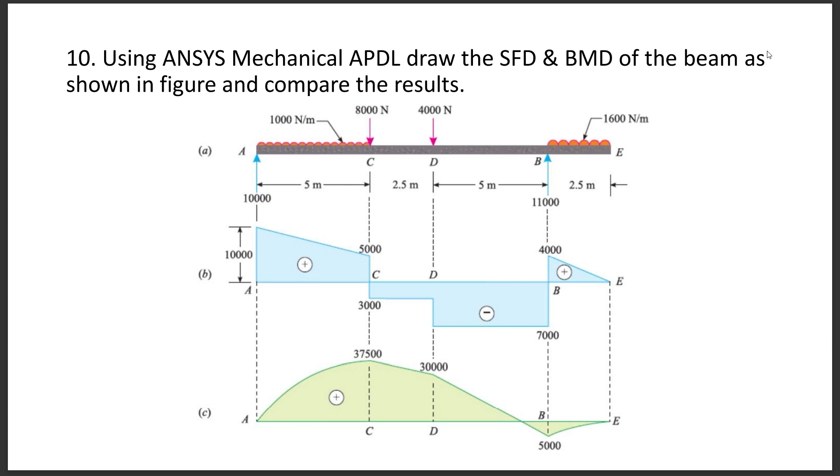We need to analyze this one using ANSYS Mechanical APDL and then we have to compare these results with the question paper itself, because in the question paper itself we are having the results that we compare with the results obtained from ANSYS Mechanical APDL, right? So without wasting time, let us start our analysis using ANSYS Mechanical APDL.

First of all, we need to create a directory and in that directory we need to save everything. Next to that, we need to change the title. That can be done from File, Change Title, and we are keeping the name as FEA10. To see the title we can click on Plot, Replot, so it is visible at the lower left corner. Now we need to define what type of analysis it is and it will come from Preferences. So preferences is structural analysis.

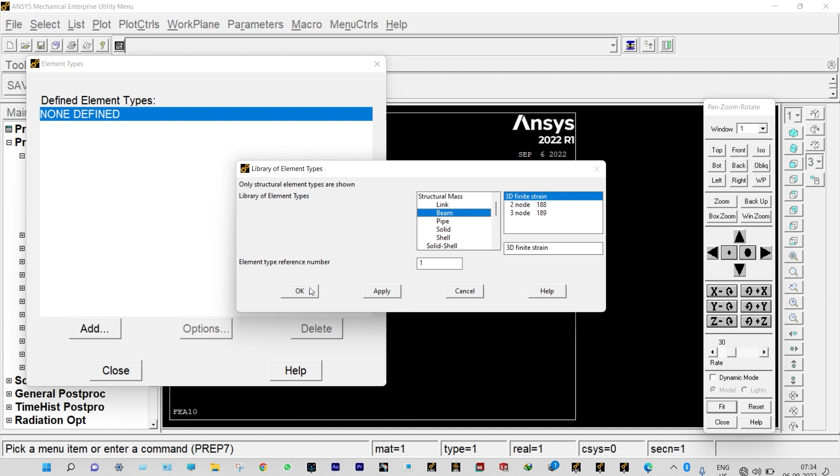Now we need to define elemental properties. It will come from Preprocessor. Element Type, Add/Edit/Delete. So we need to add it. We're considering BEAM 3D 2-node 188 and element type reference number is 1. And from options, you can select element behavior as cubic form. Okay, done. Let us close it.

Now we need to provide material properties. So Material Models, Structural, Linear, Elastic, Isotropic, and we know that it is having modulus of elasticity of 2 into 10 to the 11 Newton per meter square and Poisson's ratio is 0.3. So modulus of elasticity is 2e11 and Poisson's ratio 0.3.

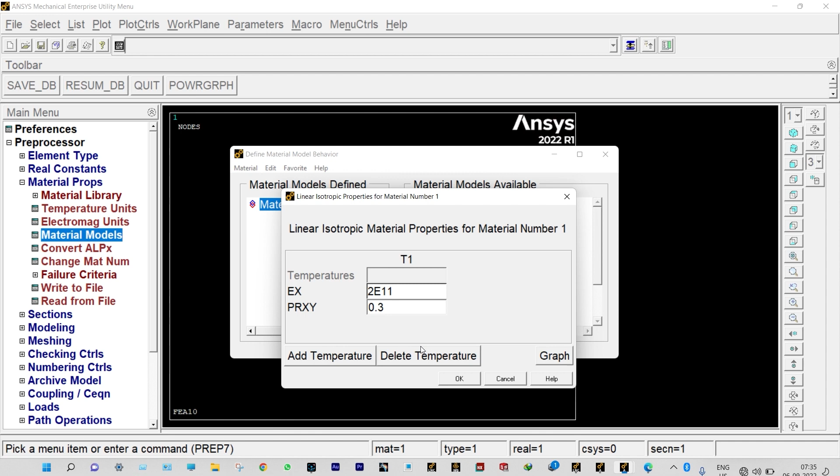Okay, done. Now we need to provide sections and it is having a square cross section of breadth equal to 0.01 meter and height also equal to 0.01 meter, right? So breadth equal to 0.01 meter and height also 0.01 meter. Okay, done. Now we need to start modeling.

Create key points in active coordinate system. We know that total span of the beam is 15 meter and first key point will be created at origin. So apply. Second key point will be at a distance of 5 meter from origin. So 5 along X. Apply. Third one will be at a distance of 7.5 meter from origin. Apply. Fourth one will be at a distance of 12.5 meter from origin. Apply. Fifth one will be at a distance of 15 meter from origin.

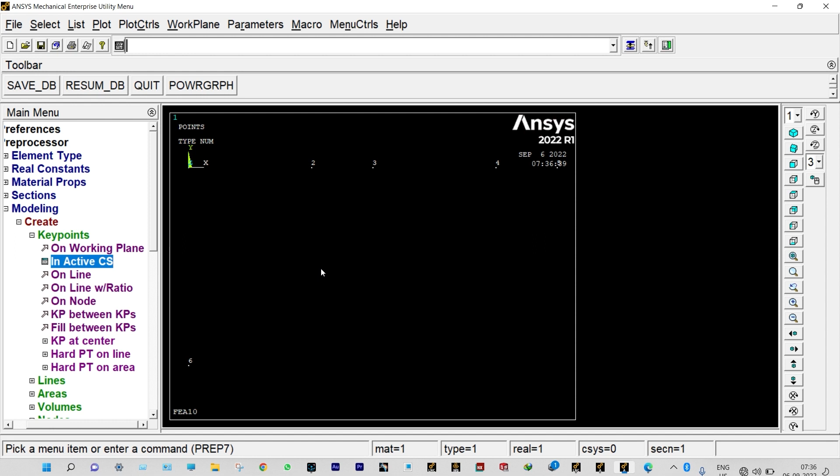Apply. Now one extra key point should be provided for the orientation of the beam, and let us provide that one at x equal to 0 and y equal to -8. Okay, we created all the necessary key points. Now we need to join all these key points in the form of lines. So Create Lines, Straight Lines, and let us join key point number 1 and 2. Done. Now 2 and 3. Done. 3 and 4, and finally 4 and 5.

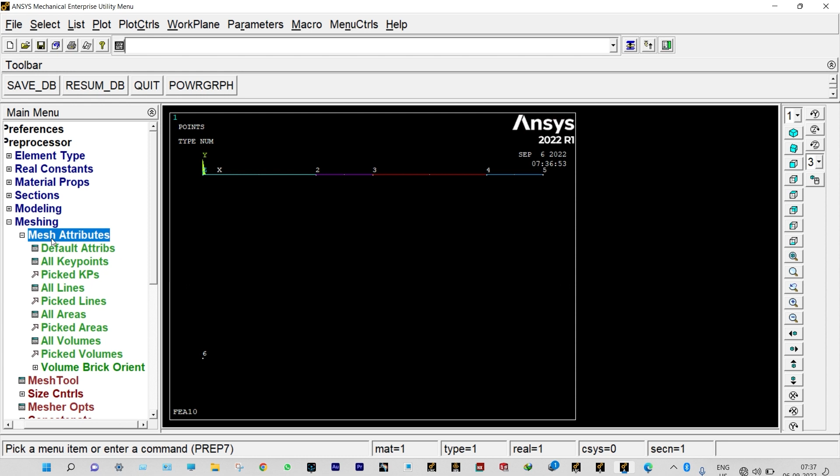Okay, we joined all the lines excluding that extra key point 6 which is required for orientation of the beam, right? Now we need to mesh it. Meshing, and first of all we need to select mesh attributes. We need to consider that orientation key point also, so we are selecting all the lines, and we are selecting orientation key point 6. Okay, done. Now we can mesh it.

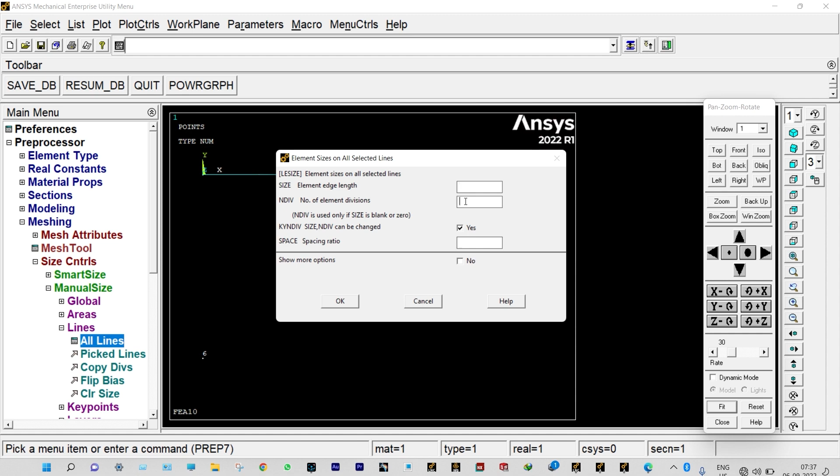So Size Controls, Manual Size, Lines, All Lines, and we are considering number of elemental divisions for each line equal to 10. Okay, done. Now finally we can mesh it. So Mesh Lines, Pick All, meshing is complete. Now we can apply our boundary conditions and that will come from Loads. Loads, Analysis Type, it is a new analysis and it is static structural analysis. Okay, done. Now we need to define loads. Apply structural displacement on key points.

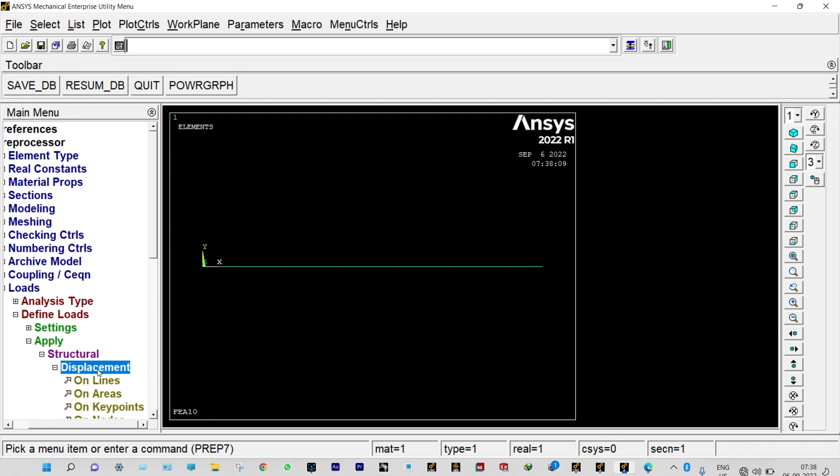It is an overhanging beam and it will be having support at two different locations. Let us see the lines. So plot lines. We need to provide a support at this location and also at this location, right? So select key point number 1, apply. Let us select UX, UY and UZ, and also rotation X and also rotation Y. So the key point is restricted to move along all these points.

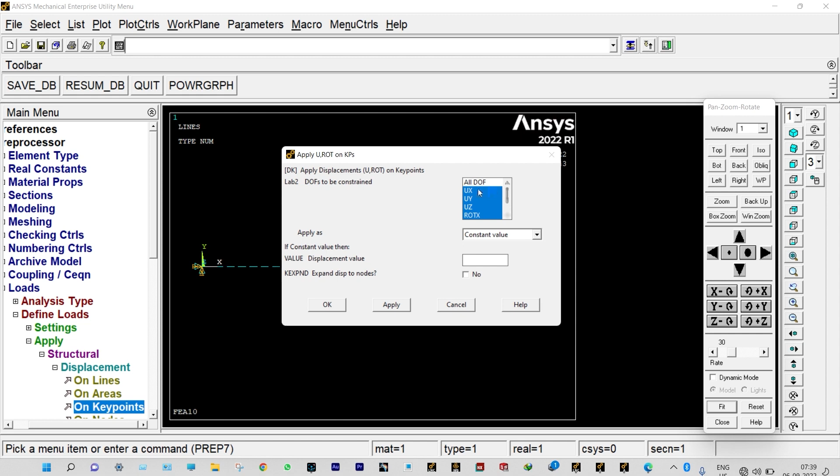Apply. Let us select the next required key point at this location. Okay, here in this case it will be restricted to move along UY, UZ and rotation X and rotation Y. Okay, done. Now we need to apply 2 point loads at this location and this location, right? Let us see the question paper itself. We need to apply point load of 8000 Newton at location C and 4000 Newton at D, right?

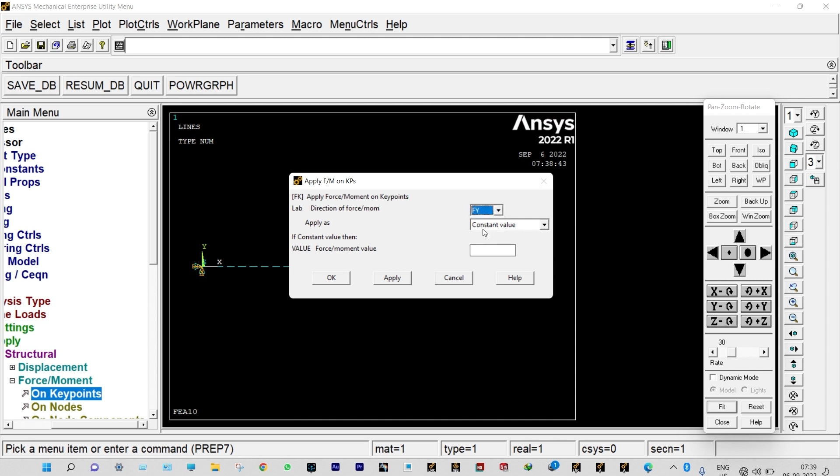So structural force moment on key points. Let us select this key point, apply. It will be in the y direction, FY, and it will be in the negative, so it will be minus 8000 Newton. Apply, and second one it will be minus 4000 Newton again. Okay, we have applied our concentrated load.

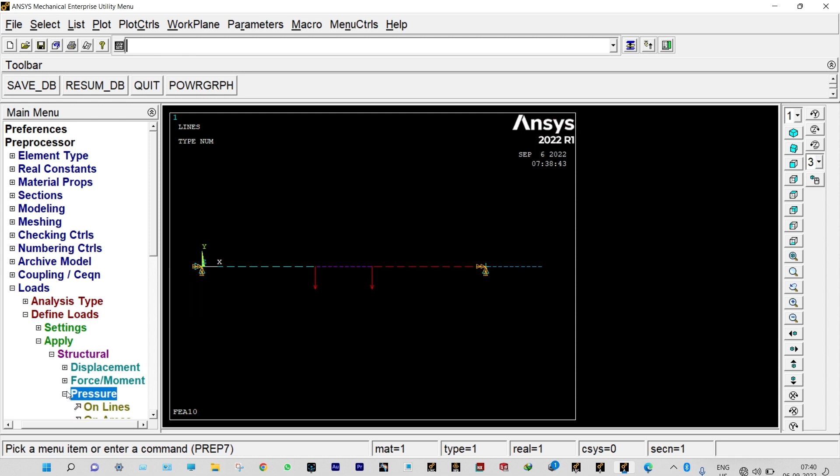Now we need to apply uniformly distributed load at this location and also at this location, right? You can see here uniformly distributed load of 1000 Newton per meter, and also here it is 1600 Newton per meter. Two different types of uniformly distributed load to be applied, right? So it will be pressure on beams. Let us select from box notation. We are selecting these specific key points or nodes.

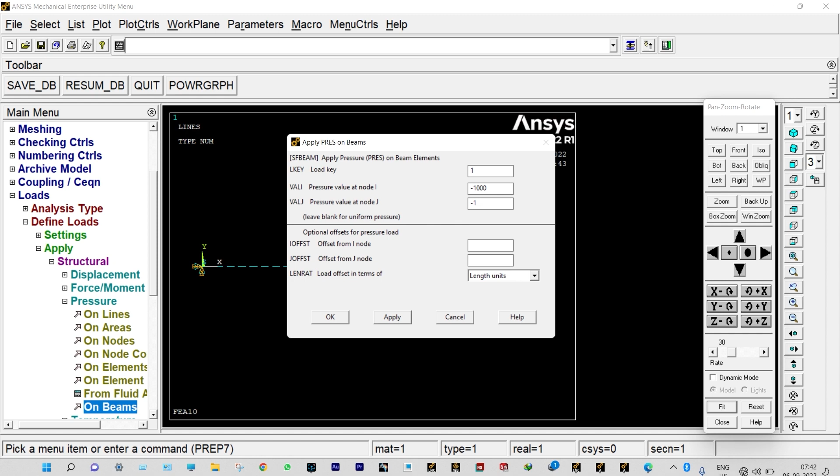We have selected all the specific nodes, apply, and it will be 1000 Newton per meter in the downward direction, right? So it will be minus 1000 at starting node, and also at finishing node also same, minus 1000 Newton per meter. Apply. First uniformly distributed load is applied.

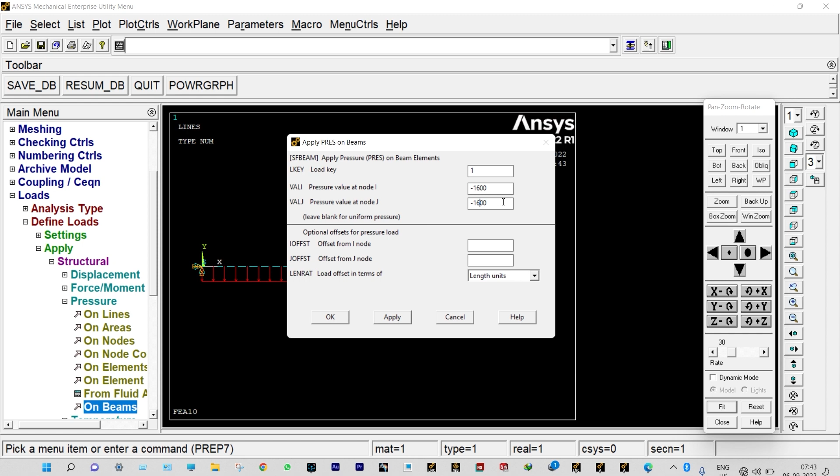Now the second one to be applied at the extreme right hand side, and that value is actually 1600 Newton per meter, right? So let us select by box, selected. Okay, this value is starting from minus 1600 Newton per meter at starting node and finishing with the same number, minus 1600 Newton per meter. Okay, done. So we have applied both the concentrated load and also uniformly distributed load at specific locations.

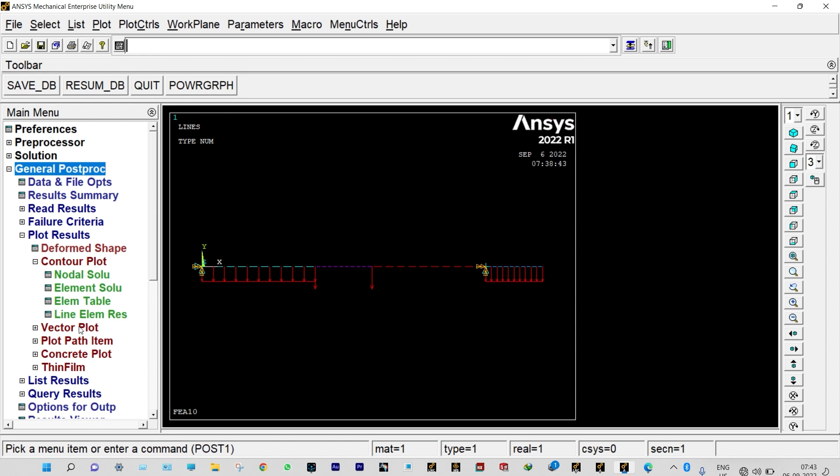Now we need to solve it. So solution, solve current LS. If everything is right, it will show solution is done. Okay, it is showing solution is done, so everything is perfect. You can see our results from general post processing. Okay, let us close it. General post processing. First of all, we need to read results from last set. Read results last set. Now we need to define element table.

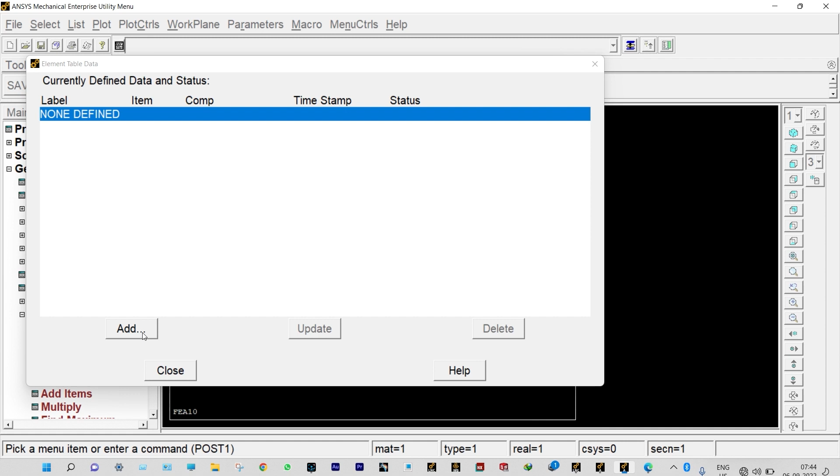So define table, and for shear force and bending moment diagram we need to select some specific numbers. For bending moment we need to select SMISC 2 and 15, and for shear force we need to select SMISC 5 and 18, right? Let us add it, and from drop down menu we can select by sequence number, and SMISC it will be 2. Apply, and again repeat the process. It is by sequence number and SMISC 15. These two numbers will be for bending moment diagram.

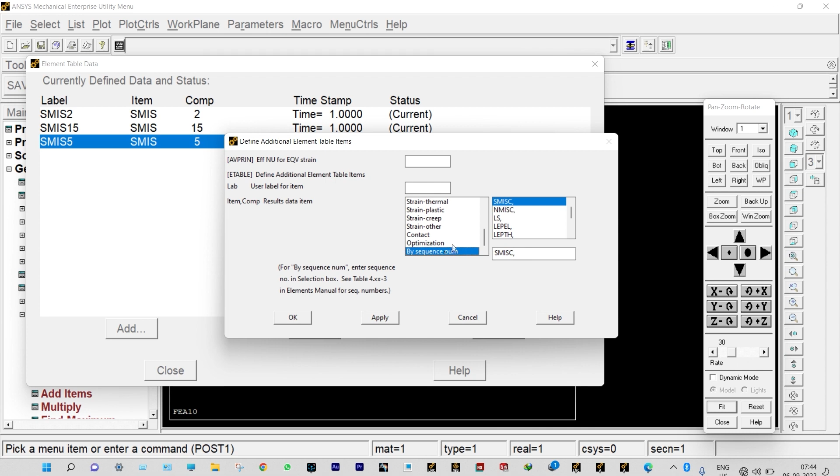Okay, apply. Next one for shear force, selecting by sequence number and SMISC it will be 5. Apply. And the last one again by sequence number and it will be SMISC 18. Okay, we have selected all the numbers. First two numbers SMISC 2 and 15 for bending moment, and next set 5 and 18 for shear force. Okay, let us close it.

Now first of all, let's see the results from listing. So list results, and we have to see reaction solution. Let us select all items, right? You can see that maximum reaction is occurring at node number 1 and node number 42. Node number 1 along y direction it is 10,000 Newton or 10 kilonewton, and also at node number 42 it is 11,000 Newton or 11 kilonewton, right?

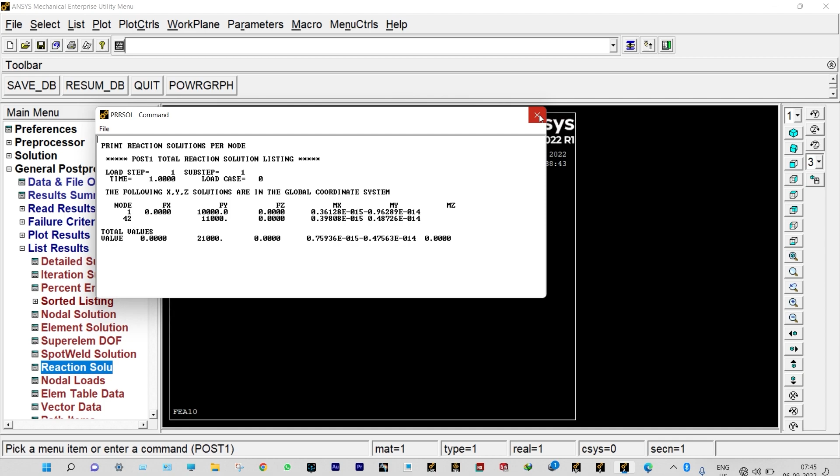Let us check this one from actual question paper also. It is 10 kilonewton and 11 kilonewton, right? Let us see it from the question paper for comparison. You can see exactly same. At node number 1 it is 10,000 Newton or 10 kilonewton, and at extreme right hand side it is 11,000 Newton or 11 kilonewton. So it is exactly same, right?

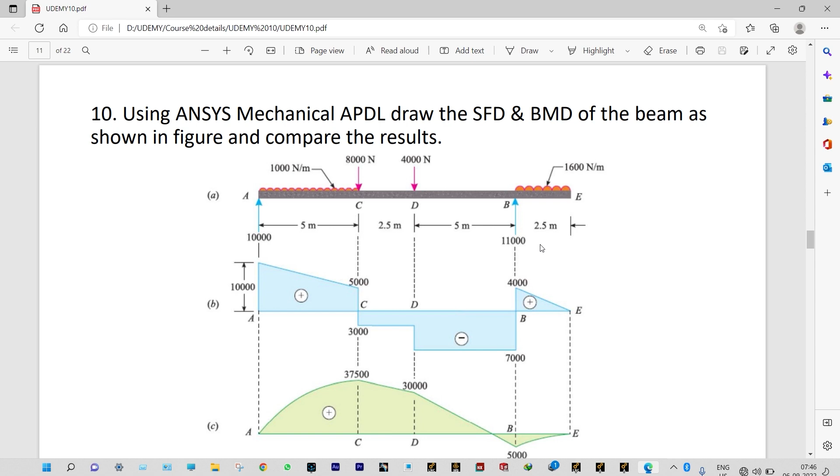Done. Next to that we need to see our results, both shear force and bending moment from listing results. So element table data, and you can select all the numbers SMISC 2 and 15 for bending moment and SMISC 5 and 18 for shear force. So this will show all the shear force and bending moment at specific nodes, right?

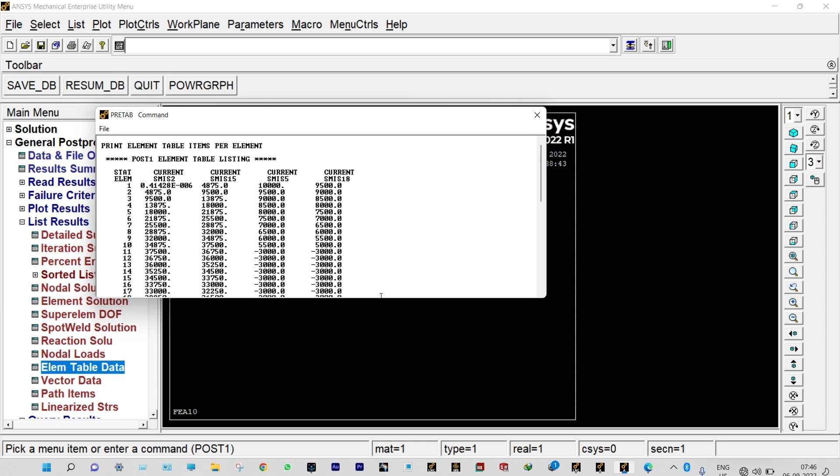Okay, let's see it. So this is the data. It is representing shear force and bending moments at all locations, right? You can see it in a better way. So we are having total 40 nodes, and at each specific node it is showing shear force and bending moment.

First two columns, represented by SMIS 2 and SMIS 15, represent bending moment, and the third and fourth columns, represented by SMIS 5 and 18, represent shear force, right? Each specific node is providing data at specific locations representing bending moment and shear force.

We can see at the last, maximum bending moment is occurring at node number 11. It is 37.5 kilonewton meter. It is occurring at node number 11 and 10. And minimum bending moment is occurring at node number 30 and 31. It is minus 5000 Newton meter, right?

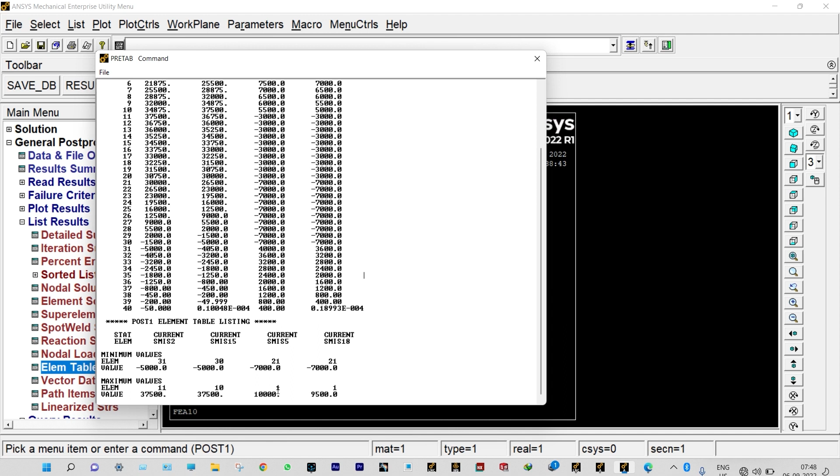Similarly, you can see here maximum shear force is occurring at node number 1. It is 10,000 Newton, and minimum shear force is occurring at node number 21. It is 7,000 Newton. Now we can see all these results from plot also. Let us see plot results. So plot results, contour plot, line elemental response, and we want to see all these results.

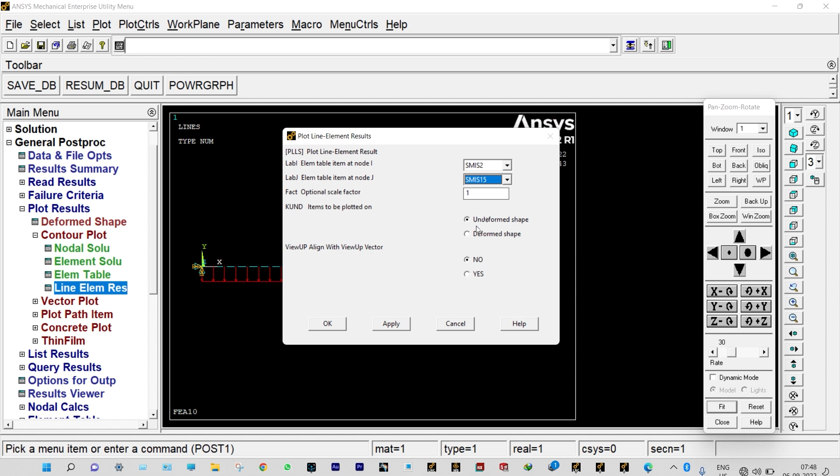Now we'll see the results from our question paper also and compare these results, right? Let us see this from question paper. It is showing maximum bending moment is occurring at this location. It is 37.5 kilonewton meter, and minimum is occurring at this location. It is 5 kilonewton meter, right? It is exactly same, so it is validating our results. You can see it, 37.5 kilonewton meter at location C and 5 kilonewton meter at location B. So it is exactly same.

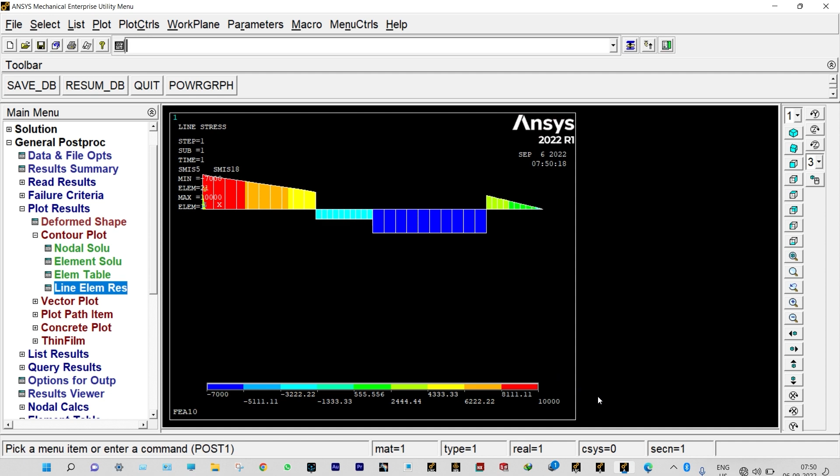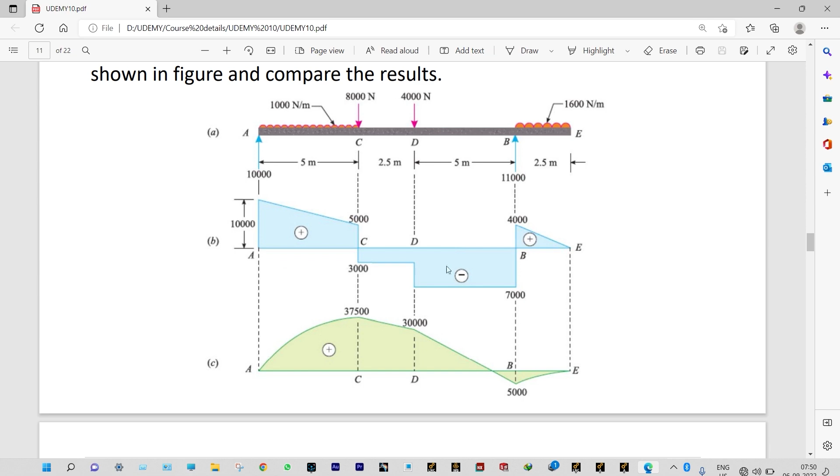You can see our results from our question paper also. Let us compare this one. It is showing exactly same. Maximum is occurring at key point 1. It is 10,000 Newton or 10 kilonewton, and minimum is occurring at this location. It is minus 7,000 Newton, right? So it is exactly same. It is validating our results. What we got from ANSYS Mechanical APDL is exactly same compared to our theoretical results, right?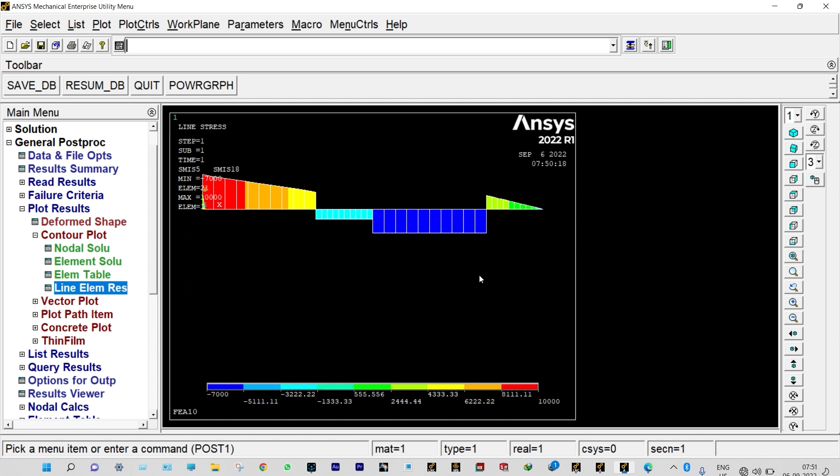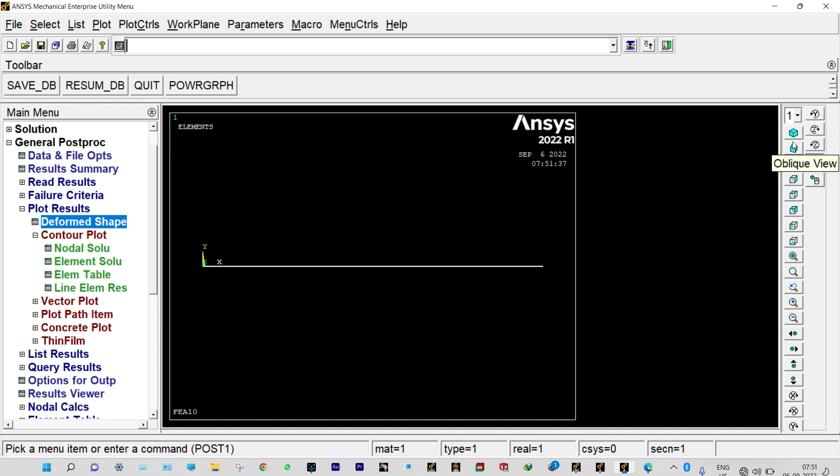Now we can see the animation of this beam. So what we'll do is plot the elements, and also we want to see that beam in the form of 3D. So plot controls, style, size and shape, and display of elements should be on. Okay, right? Now for better view, we can see the isometric view or oblique one, anyone. Let us see the oblique one. You can see this is the beam with specific cross section of 0.01 meter by 0.01 meter, right?

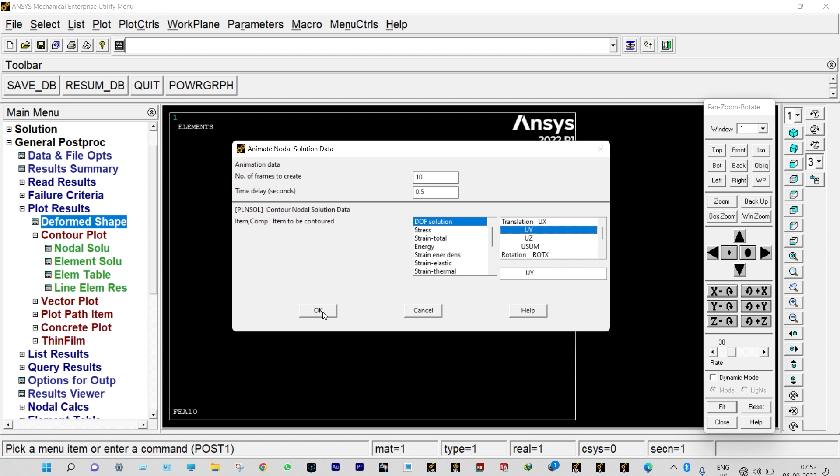Now you can see the animation of this one. So plot controls, animate, and we'll see deformed results. Translation along y direction, UY, with the default setup, you can see the translation along y direction. Okay, now for better view, we can decrease the delay period. Let us see how the beam will be vibrating, right? So this is the animation of this beam. Okay.

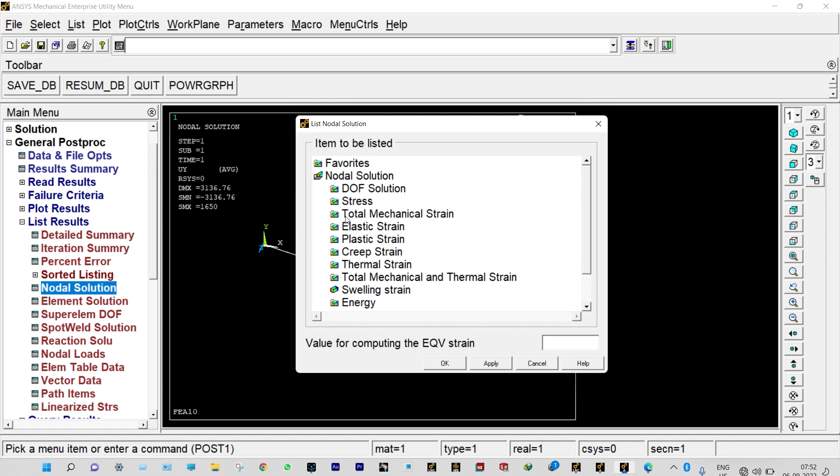Excluding this one, you can see deflection, or you can say displacement along y direction also, that can be viewed both from plotting and listing. Let us see displacement along y direction, right? So list results, nodal solution, DOF solution, y component of displacement. This is showing displacement of all these defined nodes. You can see maximum displacement is occurring at node number 26, and it is 3136.8 meter. It is very high, right?

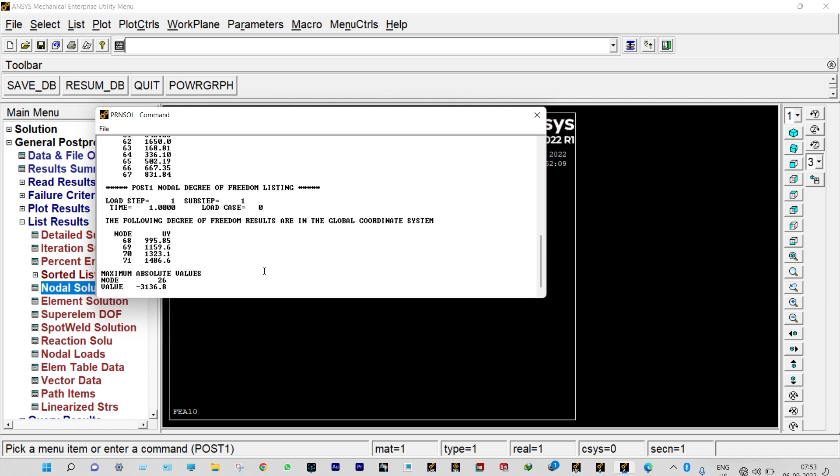I want to see the plot results of these things. So plot results, contour plot, nodal solution, and we want to see deformation along y direction. So displacement, y component. You can see here maximum displacement is occurring here. So it is minus 3136.76, right? Each defined node is having different deformation or different displacement, right? So let us close this one.

So this is all about our today's video. This was a very simple finite element analysis of an overhanging beam with a combination of uniformly distributed load and also concentrated load. In this analysis, we found shear force and bending moment diagram of that beam, and we compared that result with the theoretical answer, and it is exactly same compared with the theoretical answer.